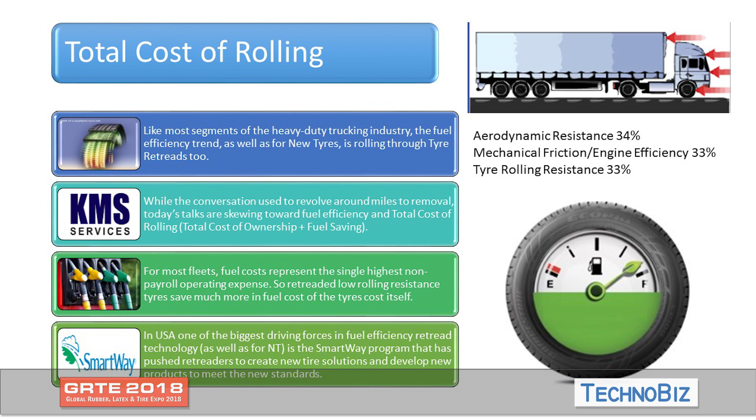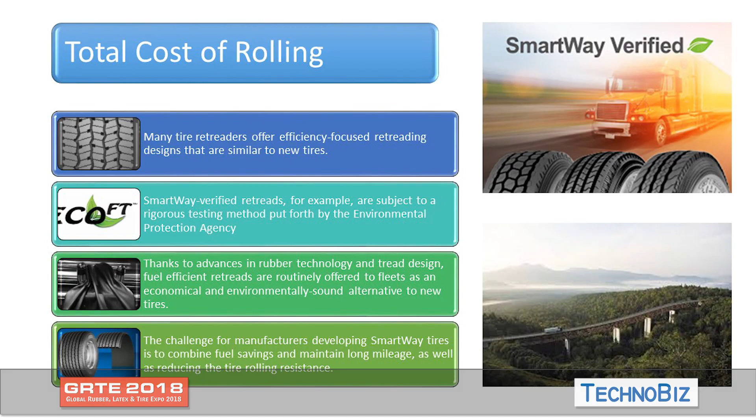An action that is sensitizing the end user on fuel consumption is SmartWay in the United States, but not only in the United States, even in Europe. And today, all the producers are thinking to produce new tread designs and compounds in terms of rolling resistance and combine it with miles, because the difficulty in this case is to combine lower rolling resistance with miles. We know that when we make a compound, if we want to have longer miles, we need to use synthetic rubber. If we want to have lower rolling resistance, we need to use natural rubber. But the natural rubber wears faster than the synthetic rubber. And so it's always a combination of the two.

As you might know, the majority of new tire producers are offering as well a retreading line, starting from Bridgestone Bandag. They are offering today a full range of products at lower rolling resistance. And Michelin as well has launched the entire line of fuel economy products, Goodyear, Continental. But not only new tire makers are doing this, even...

Can you change the slide?

Thank you. Even the producers of retreading material are offering a new line of compounds aiding efficiency in terms of rolling resistance. I haven't put here any of the Asian producers of rubber, not because I am against them, but because I sent an email to all of them asking what their news was about rolling resistance, but no one replied to me. So this is the simple reason why you don't see Asian producers here. I wrote to Elgi, I wrote to Eversafe, I wrote to all of them. Many of those are friends of mine, but unfortunately they didn't reply, so I have nothing to say.

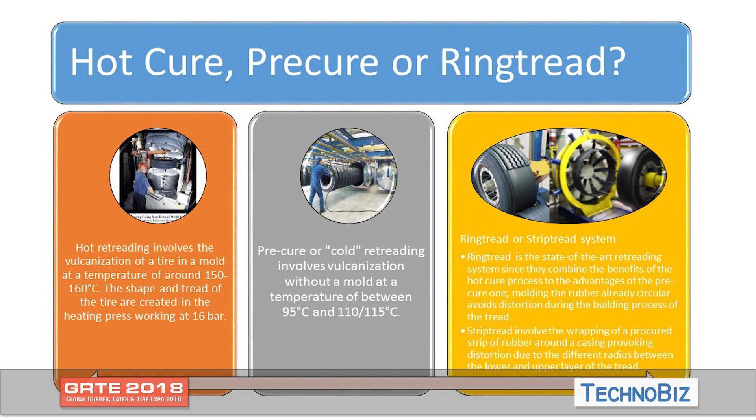So let's have a look at what are the benefits, negatives, and aspects of those systems, either pre-cure or hot cure. Like I said, the pre-cure retread process is kind to the casing. The pre-cured rubber is of high density because it's already pressed separately at very high pressure. We are talking about 160 bar, which reduces the porosity of the rubber during the vulcanization process.

These treads that are applied in the pre-cure system are already pre-vulcanized, so industrially vulcanized. That means additional control from the manufacturer of the rubber. There is flexibility, especially in a market like today, where we have seen an explosion of sizes available in the market. In the past, it was very easy. In the past, you had only a few sizes, 11 and 12.00-20. Today, you start from 215, 245, 255, 265, 275, 285, 290, 315/70, 315/80, 315/70, 315/60,

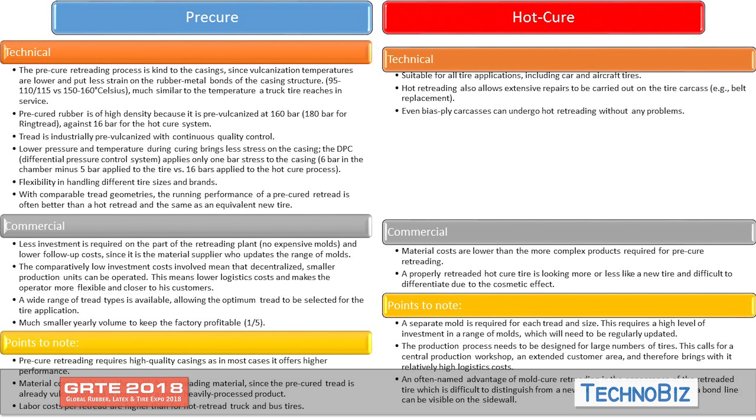What are the points to note? Like I said before, a separate mold is required for each tread and size. So if you want to start an operation in hot cure, you might think that you need to have 200-300 molds at least available, and you can imagine immediately what the cost will be. The production process needs to be designed for a large number of tires, like I said, at least 80,000 tires per year, and the advantage of mold cure retreading is the appearance. These are the two differences.

I would love to have some questions from you, but there is no time. I'm sorry. Let's go to the next slide.

Okay. Now we are going to talk about the new building technology. So we are talking about the new machines that are used to produce retreads, and the development of these machines. Here I will stay more on the pre-cure, because today, as happens in many parts of the world, hot cure production is in major factories and new tire producers, while pre-cure factories are mainly with tire dealers and retreaders. So, like I said, there is no doubt that retreading contributes to reducing the operational expenses of a fleet, which is the first point.

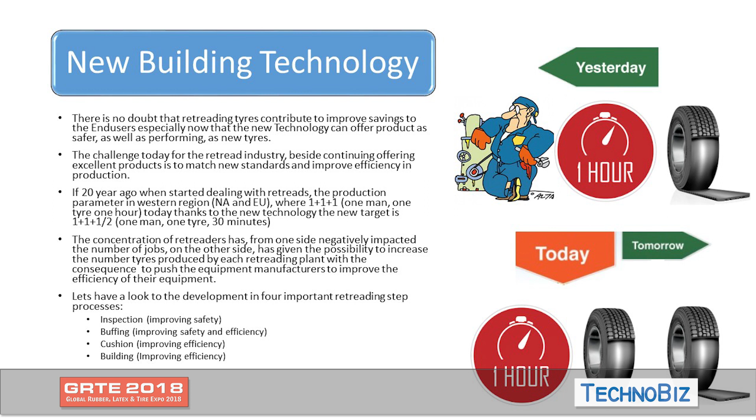Can you show a new slide? Thank you.

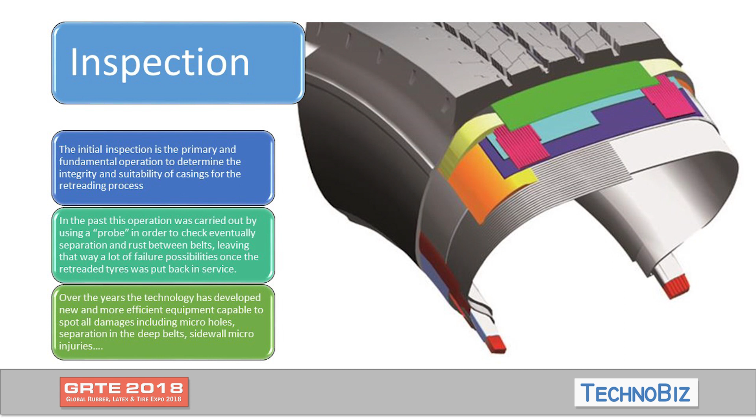So, let's start from the equipment for inspection. What is new in inspection technology? We know that one of the first roles in the retreading industry is to make tires safe. And this step is one of the fundamental steps during the retreading process: inspecting a casing that must go through the process without any problem, so it doesn't fail along the process, or worse, afterwards on the road. Okay, let's see the new equipment.

Okay, let's have a look. In the past, the retreaders were not really guilty of the failure of the tires, because of the equipment that was available to spot whether there had been some, let's say, failure in the casing.

One of the major problems that cause tire failures in retreading is the separation between the belts. In the past, the retreaders had only a probe to check whether there was a separation between two belts. They were just putting the tires on the spreader and checking the belt.

Then, after a while, the technology improved. We are talking about the 70s, beginning of the 80s. New inspection machines came, but they were very expensive and the process was very long, so very few of these machines were used. For this reason, I didn't find a lot of pictures. The only picture I found of this ultrasonic machine, because this was the same technology, this in water and this in air, was black and white, so you can understand when this picture was made.

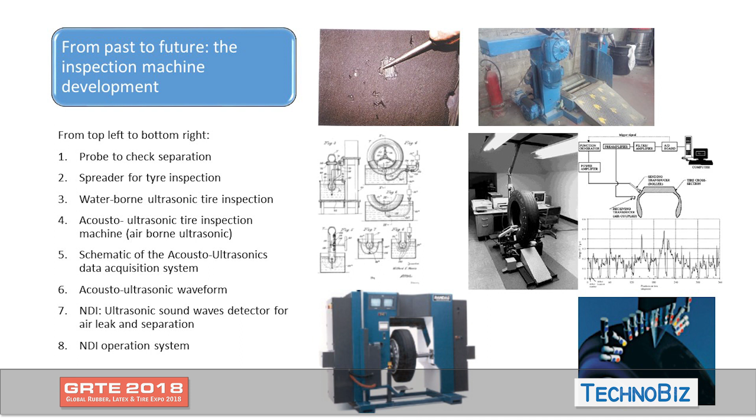Then Bandag, at the beginning of the 90s, started with the technology called NDI, which was ultrasonic equipment that was sending signals, and when the signal was deviated by a separation, it could really spot whether there was a separation.

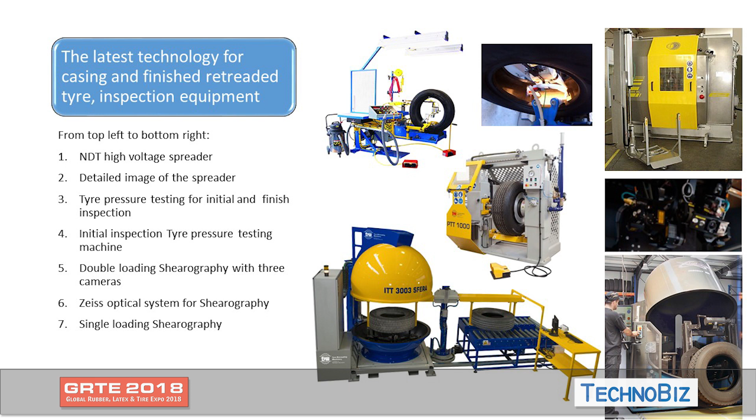Today, we have made a big step forward in terms of inspection machines. We have new machines like this NDT machine. This is high voltage, low tension, and can spot any cable that is broken in the belt. We have a pressure test machine. We have shearography. Shearography is the latest technology, and I can assure you that when the tires pass through shearography, there is no possibility that the tires can fail if the process has been properly done. Next one.

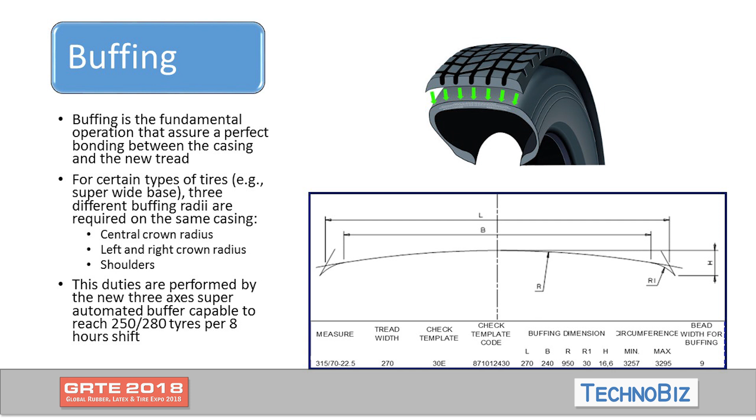Another fundamental problem in retreading is the buffing. Buffing is very important in order to match the new tread with the casings. In the past, when the tires were 100 series, let's say 11 or 12.00 R20, they were square, and a simple buffer could really do the job. But today, as the tires are getting wider and wider, to properly buff tires we need different radii. In this case, for instance, we have 3 different radii. If I go into super wide tires, we even need negative radius buffing, and only an automatic buffer can do this. Can you change the slide?

Thank you. Okay, these are the buffers of the past. No, back one, sorry. Okay, these are the buffers of the past. We start, as you can see, from the normal buffer. This is a Bandag 624. Then from the manual buffer, we moved to the joystick buffer, so you can move the buffer with a joystick with less stress for the worker. Then we entered the fully automatic buffer, like this one. And the new technology, like these two, this is from Marangoni and this is Lucatech. These are really fantastic buffers.

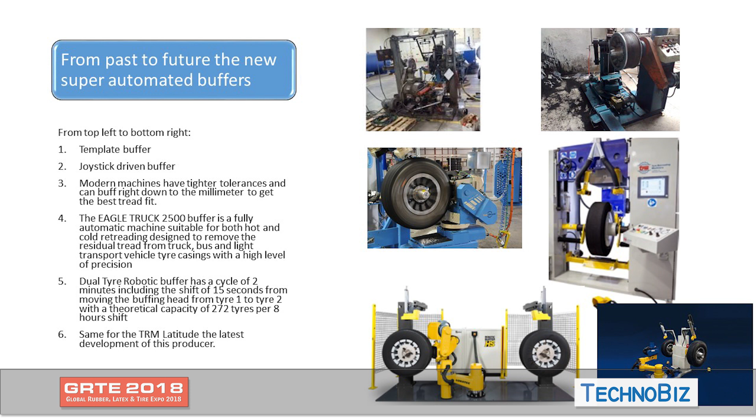I want to show you this video. Can you click here on this? No, sorry. Go back. Yeah, click here.

Thank you. Okay, this is a new buffer that I have found. It is produced by a company in Brazil, and as you can see, no workers are involved. It has two heads, one head with two tires, and in less than 1.5 minutes it can completely buff a tire. It's a perfect buffing machine. And here is the time in real time, as you can see.

Finished? Okay. Can you repeat the video, please, because it did not go to the end.

I'm not promoting this brand, just showing you what has been the development in terms of buffing. Now this is Lucatech, but Marangoni has a similar machine too. So as you can see, while the head of the buffer is buffing the crown, they are carbiding the shoulder.

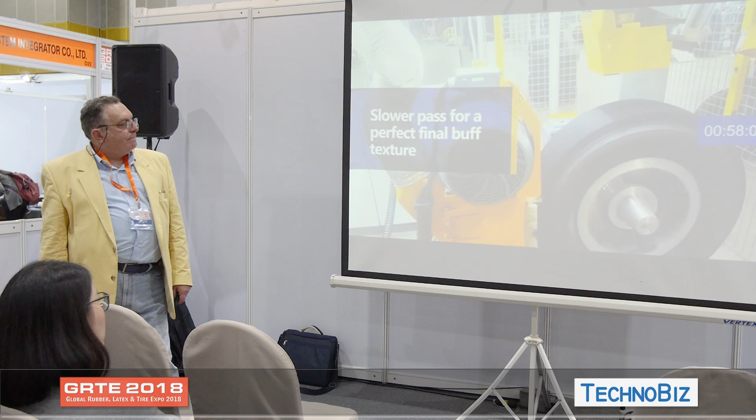Here, as you can see, there is the timing. This is real timing. Then it makes the trim of the shoulder. Okay, finished.

1 minute 25 seconds to buff one tire without the involvement of any person. You just have to type into the computer the size, the brand, the pattern, stop. Nothing more. The new tread design that you have to fit on it. Okay, can you change the slide, please?

Okay, now another step that has improved very much in the retreading process is the cushion gum application. Cushion gum application in the past was mainly done with calendered cushion gum. Calendered cushion gum could come with 1 layer or 2 layers of polyfilm. This was because of the process you are following, meaning cushion to tread or cushion to casing. If you use cushion to casing, you need only 1 layer of polyfilm. If you use cushion to tread, you need 2 layers of polyfilm. Like in this sample, cushion to casing.

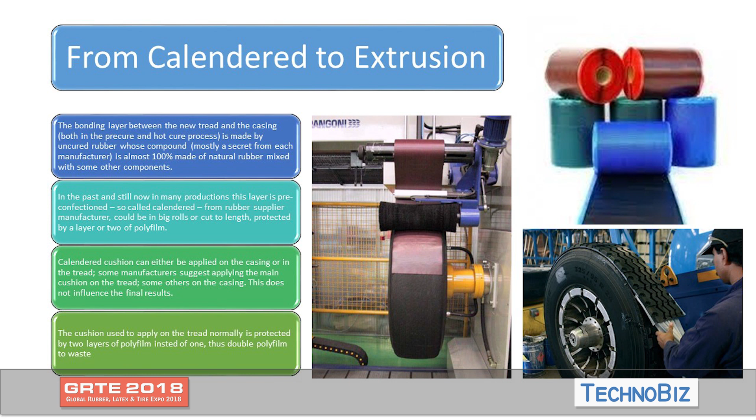So cushion to casings, one layer of polyfilm; cushion to tread. So in this case, the cushion that was applied on the tread, you need two layers of polyfilm, which means that if you apply cushion to tread, you will pay the price of the polyfilm at the same price of the cushion. This is simple because you buy the cushion per kilo. If there are two layers of polyfilm, you buy one layer more of polyfilm.

Okay. Naturally, this process is okay, especially when you have a manual builder, so the person that builds the tires manually. When you can move into an automatic builder, you have... can I have a new slide, please? Can I have a new slide?

Okay. When I go a step further, and this helps me even to reduce the process in retreading, I can have a cushion gum applicator, which are two different types. Either we have an extruder, which extrudes 1.2 millimeters of cushion gum on top of the casing in one shot, or I have the Black Swan technology that extrudes a strip of 2 centimeters of uncured rubber around the casing. These are the benefits of the two systems.

The extruder allows me even to fill bigger craters in the process. But it's very limited to only the crown. With the Black Swan, I can even go behind and enter into the sidewall of the tires. Next one.

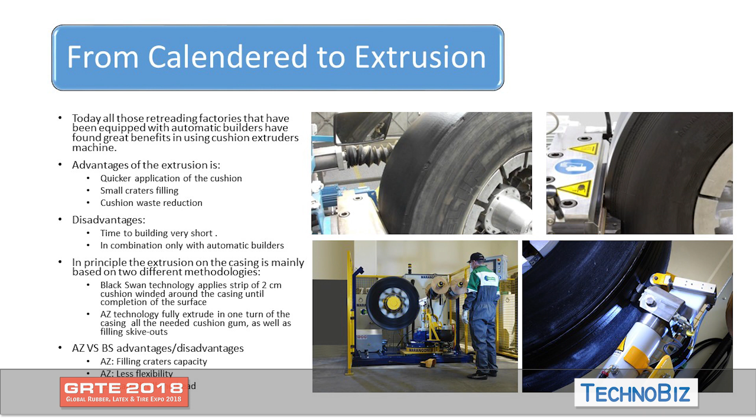Building is the same. In the past, the workers were using a manual builder, and they had to continuously stretch the strip of tread in order to match the pitch. The treads are normally cut shorter; let's say, if it's a 315/80, I need a length of 3,200 millimeters. Normally, during retreading, I had to match the pitch so that when I make the splice, the tread design matches. It's not that I cut just where it happened. If not, I have an obstacle during rolling. So in order to match the pitch, I cut shorter and then I stretch during the building.

And the worker every night really had problems with his back, because you build one tire at a time with this system. Today we have different machines that can build retreaded tires. We have ring tread, which is the best technology for me, absolutely number one, where the ring is already pre-shaped and pre-cured while the rubber is still uncured, so in the plastic state. Or we have an automatic builder for the strip tread that keeps the workers from having problems with their back.

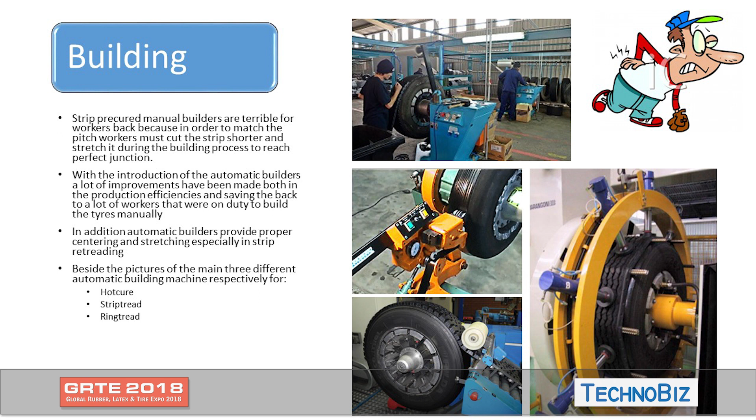And mainly the strip is more centered on the tread, because you can imagine if a worker from morning till evening has to stretch the tread, the first ones in the morning will be perfectly centered, but the ones in the evening, I'm sure, are going to fit like this. Okay, next one. I'm sorry I'm late, but okay.

The next one is the cementless process. We know that cement is always problematic for the health of the workers. The solvents that are inside are carcinogenic. Today in Europe, for instance, we have banned this type of aromatic product in the retreading process, and we are using different types of cement solution. But many factories today are moving to a cementless process.

The cementless process has strict rules during production: cleanness of the factory, temperature, and timing. These are the three important factors: cleanness of the factory, temperature of the factory. The temperature of the factory should always stay between 18 and 22 degrees. And the other one is the timing, which means that the tire has to be prepared and retreaded within a certain time.

Next one, because I'm out of time, I'm sorry for the next speaker. What is here? The next one.